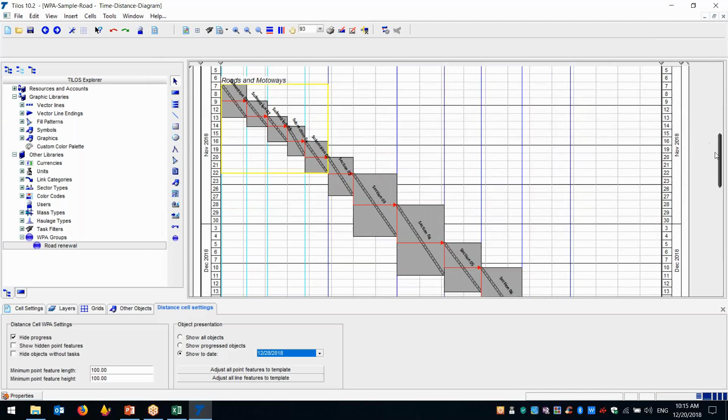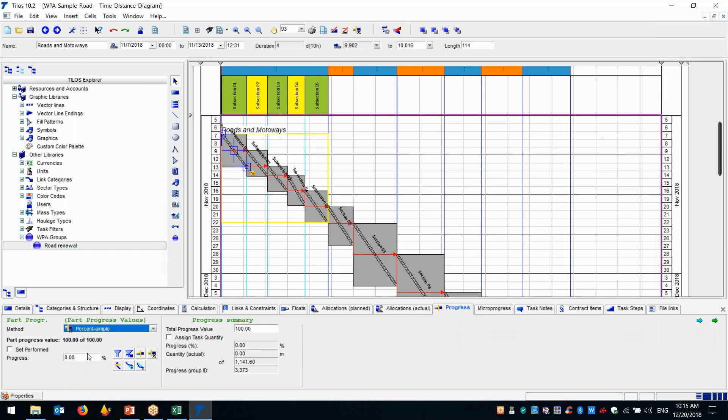You can see these are the construction activities. When you select an activity and go to progress, and enter the progress information—let's select the progress type and enter 10% progress—immediately the color changes here to blue or red, because that progress has started.

So let's open a new, empty file and create this data one by one, it will be easier to understand. I'm just opening the new file, an empty one. So now I've created an empty Tilos file.

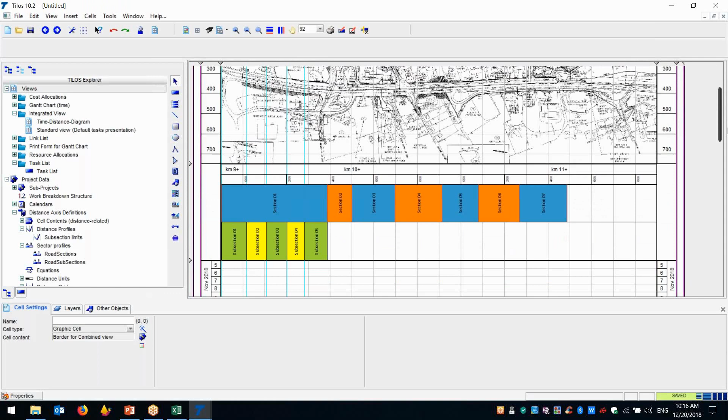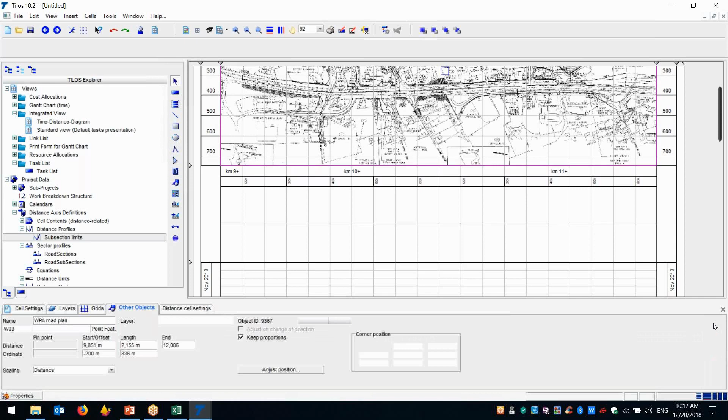Let's save this as Empty. I think this wasn't very empty, so let me delete this, and delete this also, and this one. Okay, and here we also select and delete from here. Now let's open the empty Tilos file and I'll guide you step by step how I'm creating the project.

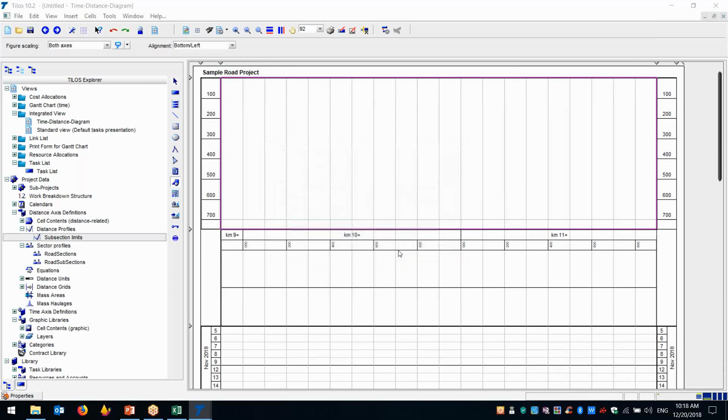Number one, I need to add pictures, so what I do is the classical method—select add pictures, enter the pictures the classic way. We select the file, select all files, and here we select the roads and insert them. So this is our picture, now inserted into my project.

I need to adjust my picture for my project, so I can set the distance and keep the proportions. I can also apply a setting like -200, apply it this way, and have my picture ready here in the system.

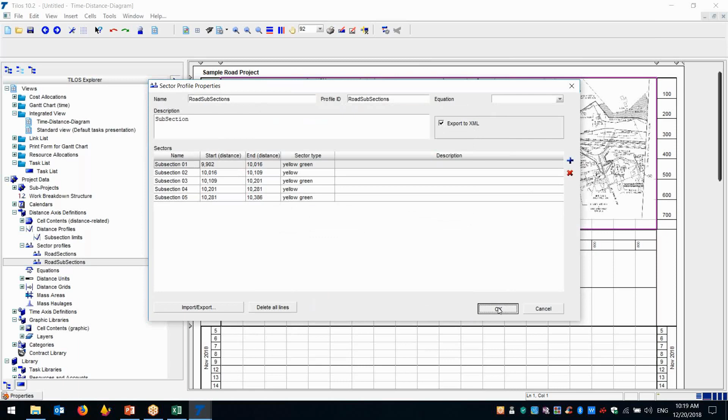I'd like to divide my project into sections, so in sector profiles I can select this area from Excel. This is the sector profiles, and Tilos makes this easy—you go to sector profiles, imports... no, not that one. Here, sector profiles, and we import it.

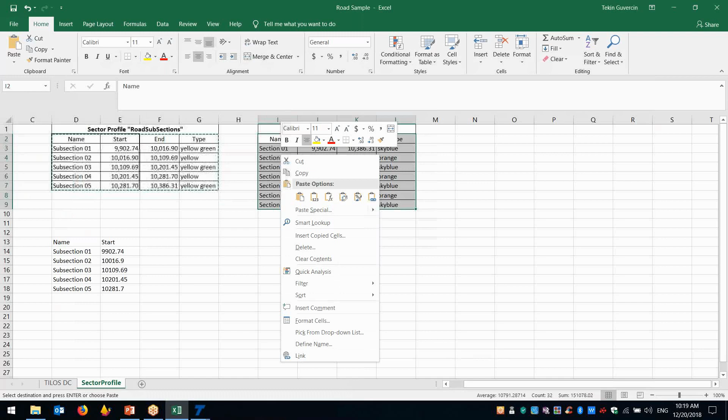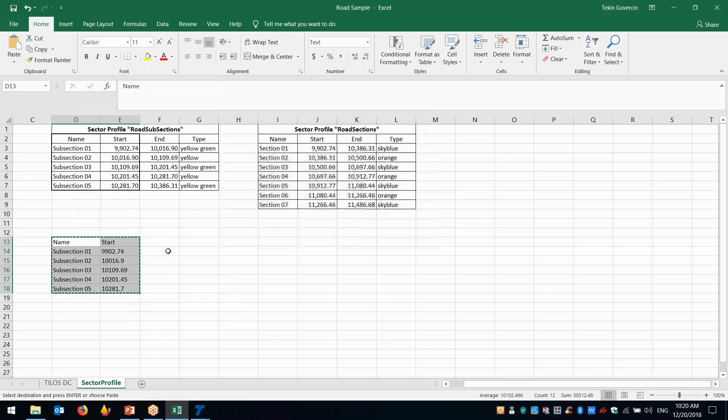We select section profiles and road sections, and we can go to road sections, select here, copy, and here we have road sections. You can see section 1, subsection 1, 2, 3, 4, and we select those and put it here as subsection limits. Let's set it to 0, and you can see we have subsection limits, and we can make the lines here.

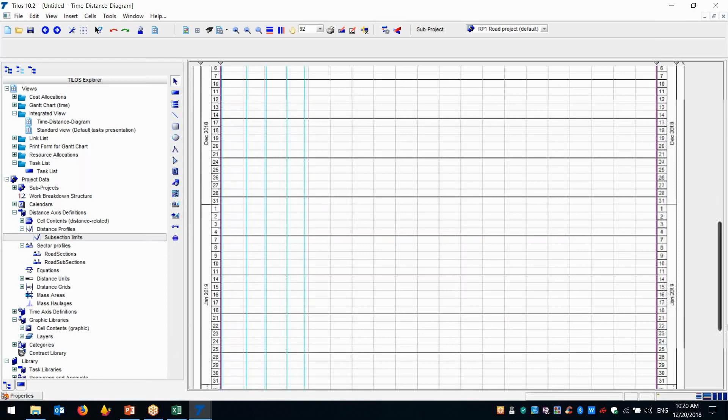So what I did now is create my project information lines—project section, subsection—and I imported my project map.

You can see we have a new function here called adding points, so you can mention we're going to have new points here. You can enter the new points and create a line here, which we call a new object line. I don't want to take too much time creating one line for each section.

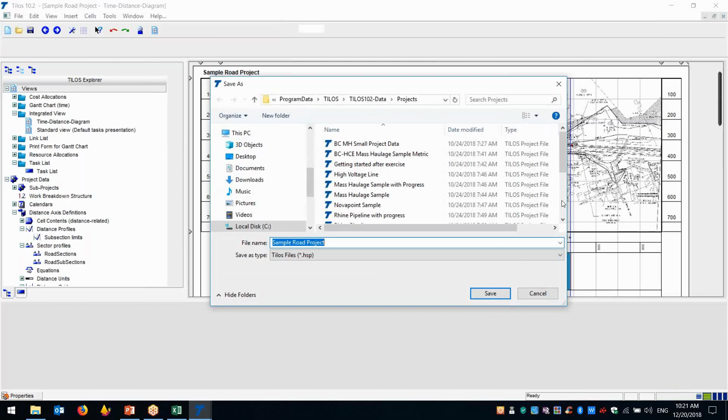I have already created this code here—let me just open it because it takes some time. And here, I created this one.

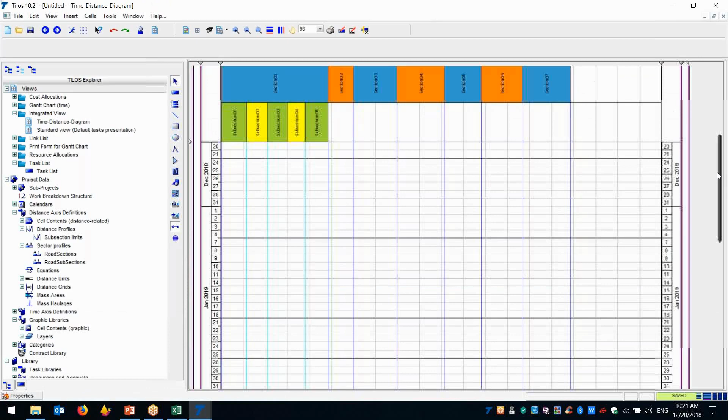Now you can see this is the one I created—an object created as a line by entering the insert points feature. The second one is from section 1 to section 3, and the third one is section 3 to section 4. You can see that in each section we've created one line.

Now you need to enter the activities, so we select and enter the first activities here. You can just draw it as an activity, and from here, when you enter the activities, you can also go to coordinates, where you can say this is for subsection 1 activities.

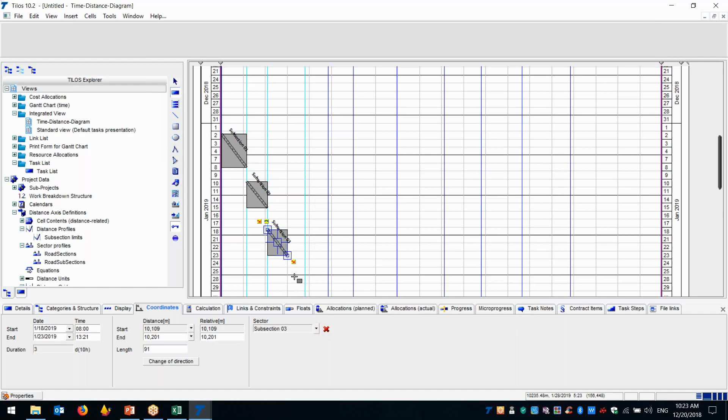The second activity we can also register here, saying this is section 2. The third activity here we say section 3, subsection 3—it automatically applies it. You can also register another activity for section 4, and another for subsection 5, so I've created subsection 1, 2, and 3 activities.

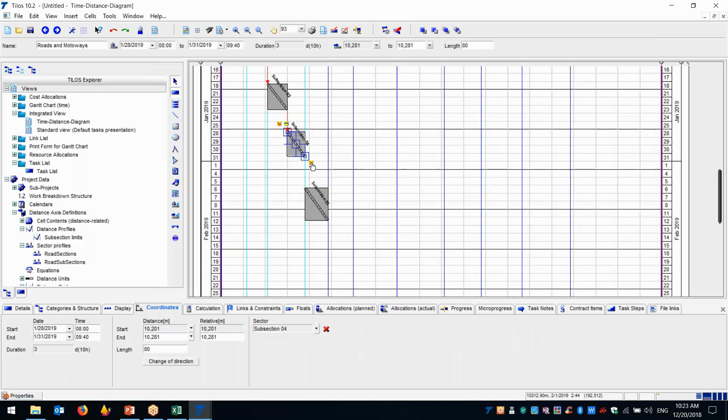I can link these activities so this one finishes, this one starts, this one finishes, this one starts, and this one finishes, this one starts, and this one finishes. As you see, this one starts, so I've created the link and can schedule it. You can see all of them are finish-to-start relations, created this way.

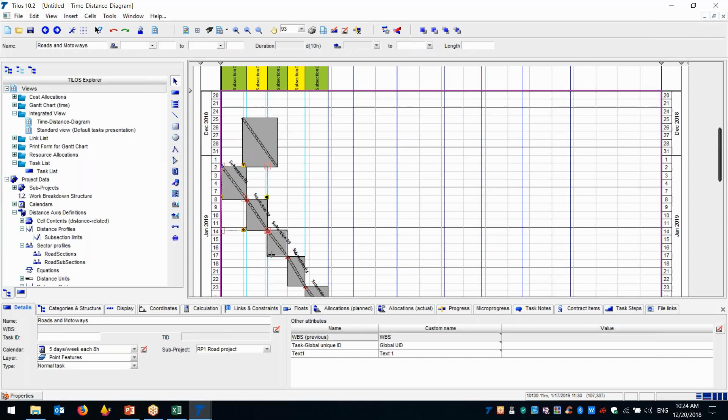You can also enter other activities here, for example for summarizing—just add another activity, let's say this is the summary task. You create a summary task, and in this case you select those other activities and insert them inside the summary task, and now it's one activity.

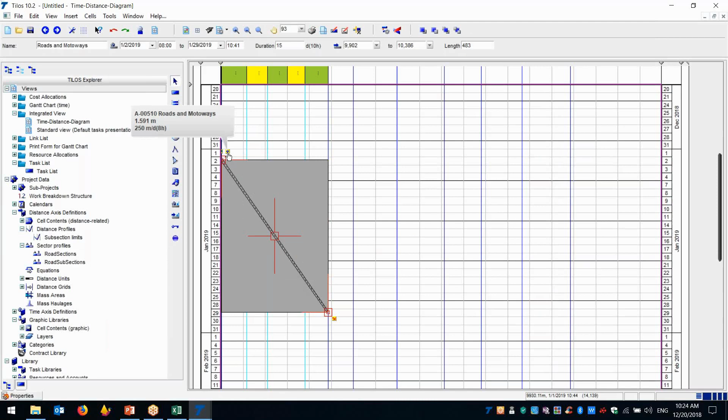But if you want to see the details, you can just press and expand it. And now this task—let me also create the others. You can add a second, third one, but let's not waste time entering all of this.

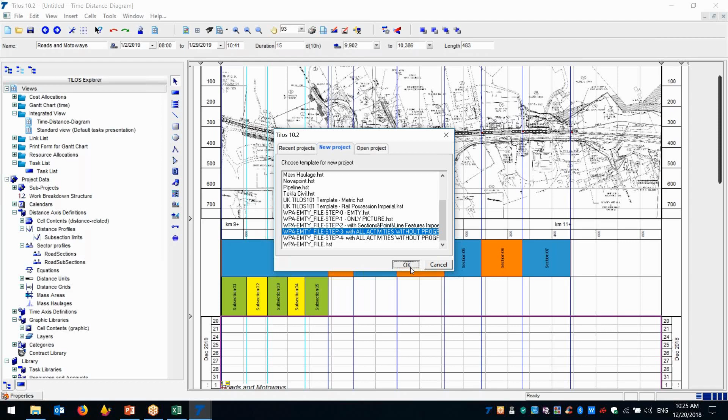I can open, for example, here, already added activities. Let's say I open again a new file which already has all activities created. All right, so let's go here.

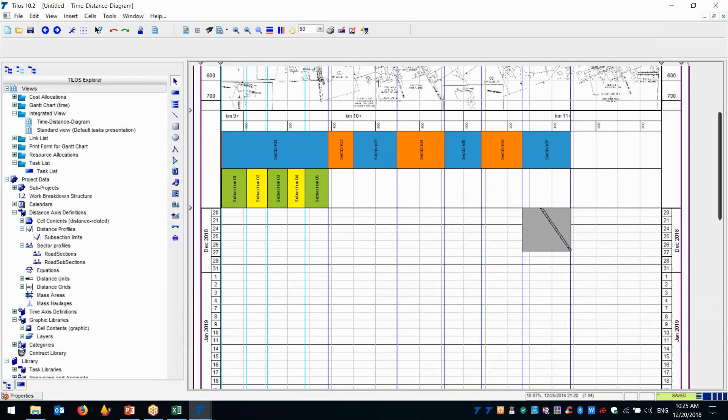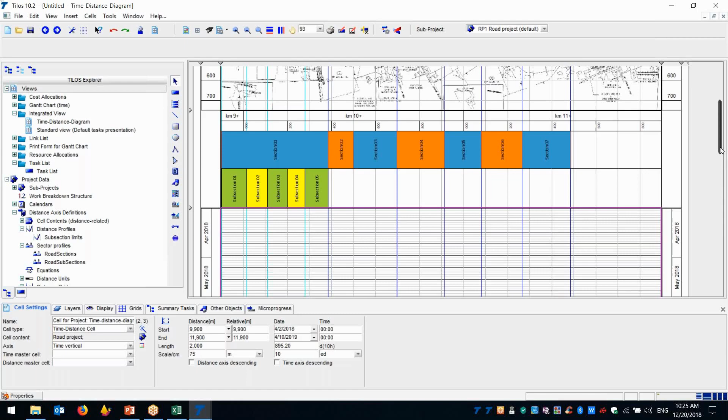Okay, so these are the samples with all activities already created. We don't see all tasks because the view is starting from December, so I need to change the starting dates. Let's say April 1st. Let me check. Yeah, here. Maybe I can start it from October instead. So I select it here. October 1st. Okay.

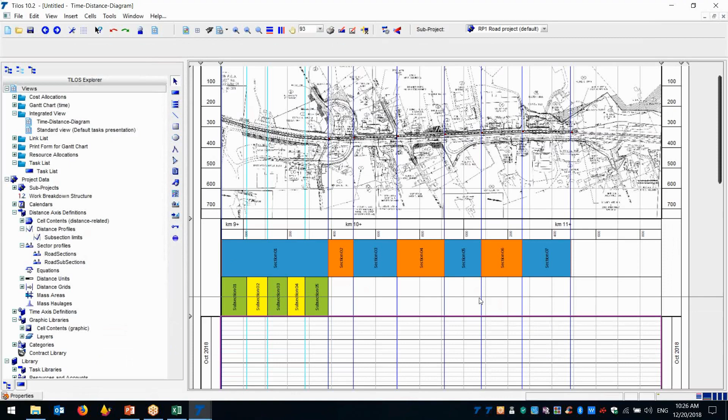Now I have also task here shown, sorry, in the wrong file. Let me open it one more time. Probably I should close it. Okay.

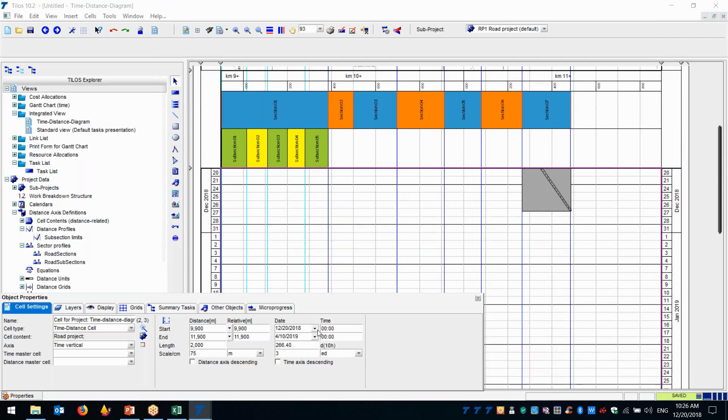All right, I created it again for the file with the loaded activities, so we start from here. I'm just saying, show me the activities starting from 1st of November. So when you enter all your tasks, you can see your project activities are going to look like this. Of course, I was creating finish to start relation.

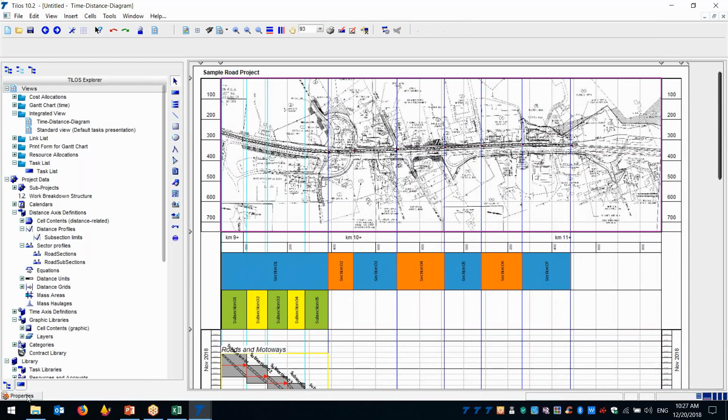Here I have another relation type: when the first activity reaches 50% progress, then the second activity starts. Now I'd like to show you what I mentioned at the beginning, so when you go to distance cell settings, you can say show my activities, to see how it looks.

When you have 8th of November, you can see that because your activity's planned starting date is 8th of November, it shows the activity on top as red, meaning it's in progress. When we have the 15th, this activity has more than 50% progress. At the 22nd, it's still more than 50%, but the next activity also starts. So these are the planned dates you can have.

But what if you don't want to show planned dates and instead want to show the progress? I selected the progress periods, but when I select the progress view, you can see there's no progress here. Why? Because it's taking the actual progress.

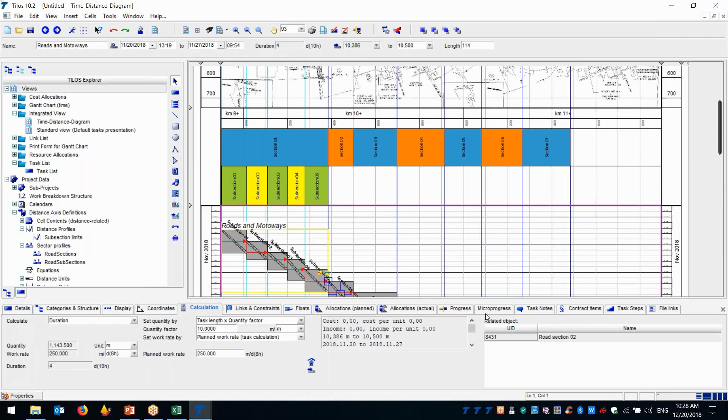So what I need to do, let's say I select this activity, section 2, and open the properties, and go to my activities progress. And from the activity progress, I can enter that this activity has 50% progress. When I select 50% progress, see that my activity line here, section 2, turns blue.

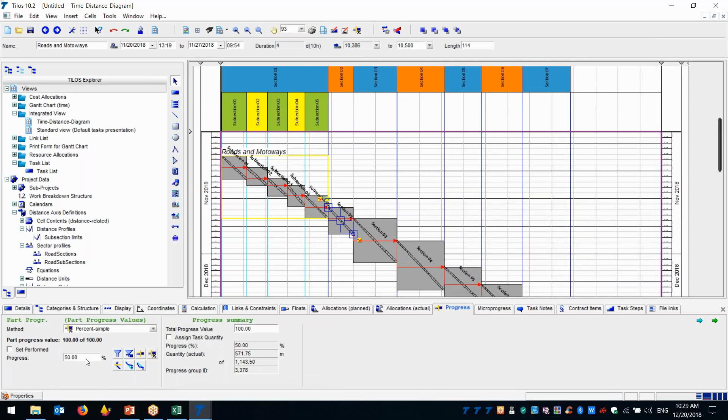If I write it again for this activity, 75%, you can see when I enter 75% and press enter, it's showing blue. When I write it as 100%, the activity turns green. It means that when I enter progress on my task, the color of the line automatically changes.

Do you have any question? If you have any question, please type it.

Our idea is that we are now entering progress on tasks. With the new Tilos module, Work Phase Assistant, we can display the colors. So let's select the second activity. When you select it, for example, you don't have to go to task - I selected the line and select the task, and it automatically selects the task. And here we enter the progress.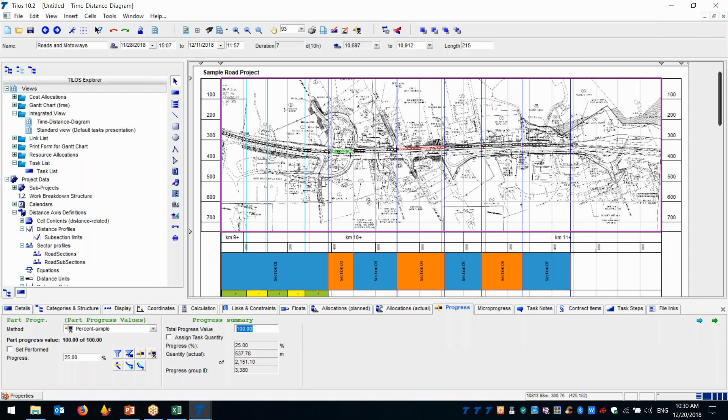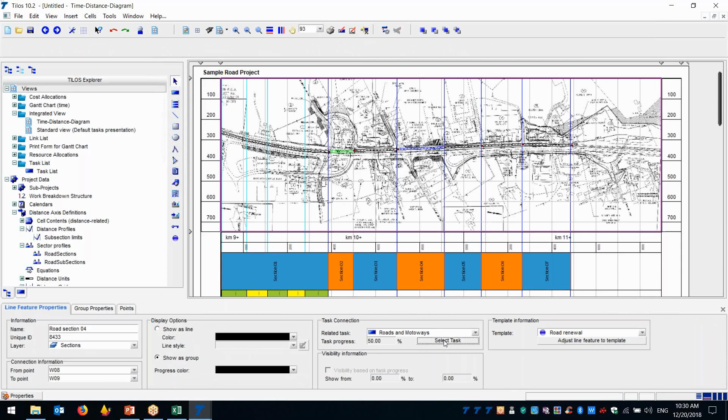Let's enter simple progress. Let's say this is at 25%. You can see the color moved to red. If you write 50% here, the color moves to blue. And if we write 100% here, the color will be green. This way, you can see which activity is completed, which is in progress, and which activity is not started.

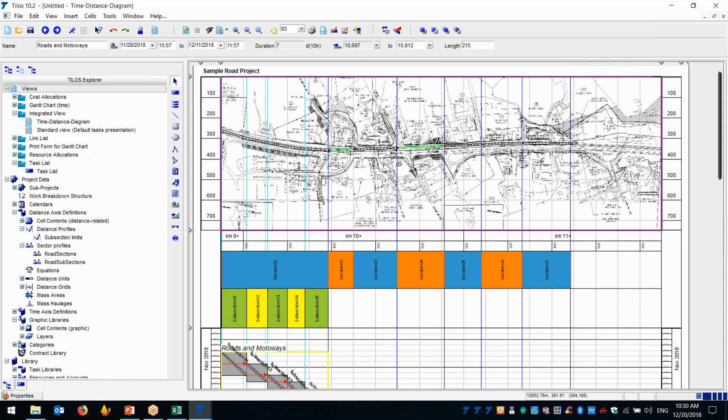As a final one, let me show you how it looks. You can also do something very valuable: open, for example, planned versus actuals in two screens, which gives an excellent presentation for your project team, showing this was planned to have completed section 1 and section 2. It shows that section 1 is not started yet and section 2 is less than 50%. Here you can see the comparison, and on the date you can go here.

For example, here, on December 6th, you can see that the plan was to complete this work, but we didn't start it yet. So you can just select and immediately compare planned versus actual work. Is there any question?